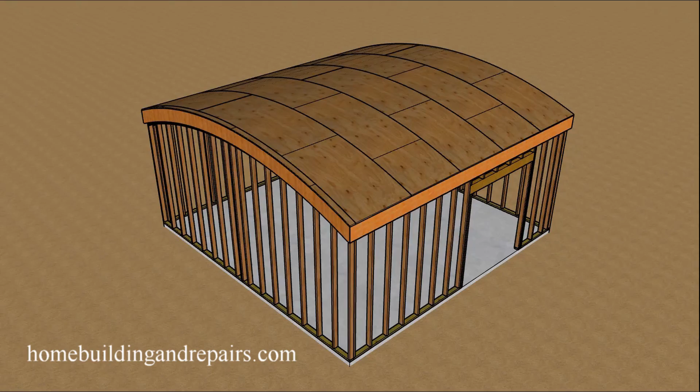Here's a video that I promised to make a while ago. I made a couple of videos on how to put together a wall with a curved top plate, and I'll put a link here to that video if you haven't seen it. But I thought this would be a neat video to make.

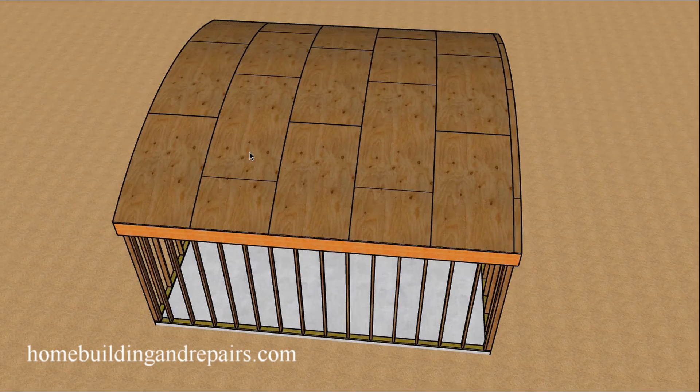I'll remind you this is not something that might work in your area. I hate these videos where people say 'oh, this will work.' Well, you've got to check with your local engineers and local building authorities, building and safety departments, stuff like that. So I'm not about to say 'oh yeah, perfect, just go ahead and build this thing.' It just might not work in your area or even in your country. People watch these videos all over the world.

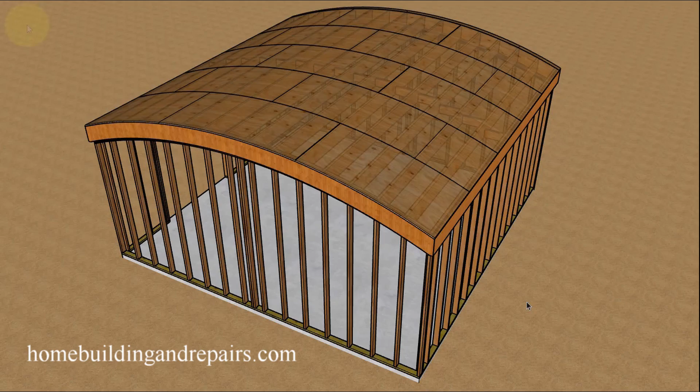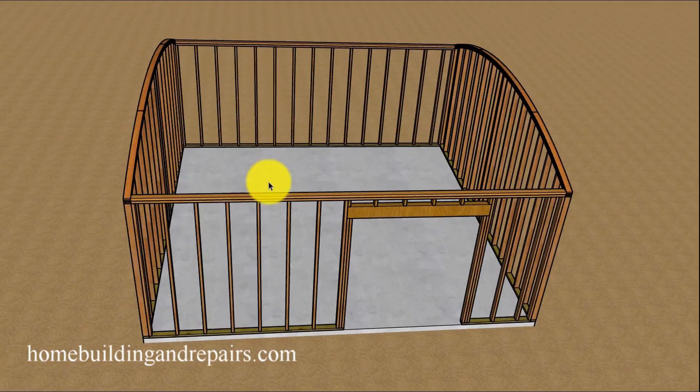Let's go ahead and pull the roof sheathing off, pull the fascia board off, and the 1x6 that we have for stucco or siding furring, and the midspan blocks. Pull out the blocks that are holding the rafters, or the joists, whatever we want to call it. Again, this is the building with the curved walls. I showed you how to build the curved wall. Now we have a duplicate on the other side.

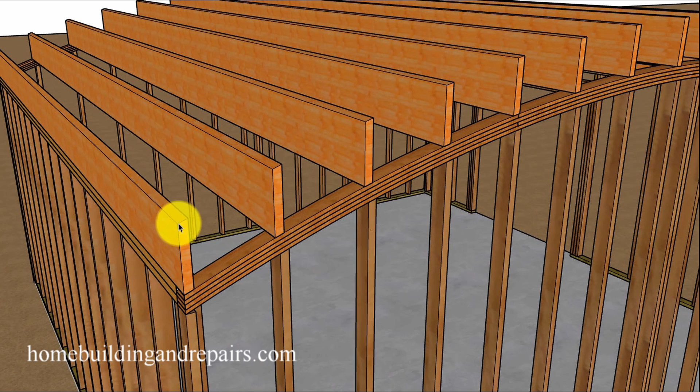Now, the first thing we need to do after we build the wall is install our joists, and they'll be installed one at a time. These actually have a shaped or angled top and bottom, and the lower joists or rafters are going to have a steeper angle than the ones near the top. As a matter of fact, the one on top is only going to need to be ripped down, it won't need an angle on it most of the time. Near the top, but the ones at the bottom, of course, you can see we will need an angle on the top and the bottom.

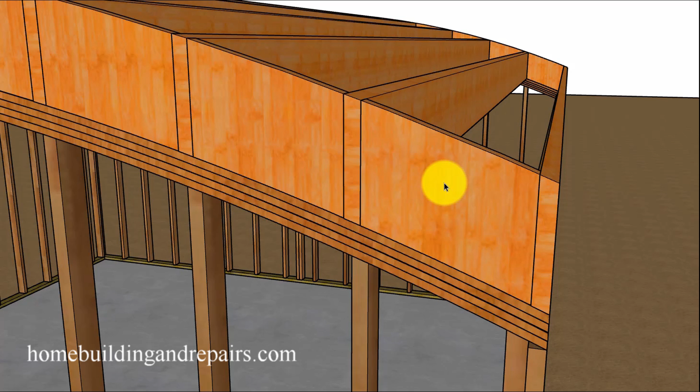And of course, shaped blocks - these will be cut, and they will not be the same blocks, just like these rafters will not have the same angle. The one down here might have a 15 or 20 degree angle. This one here might be a 10 degree angle. The one at the top might be 3 degrees. We can see here how it's getting a little shorter. I drew this up, so trust me, I know what I'm talking about here. When I say these parts are going to be different, it would be nice if they were the same.

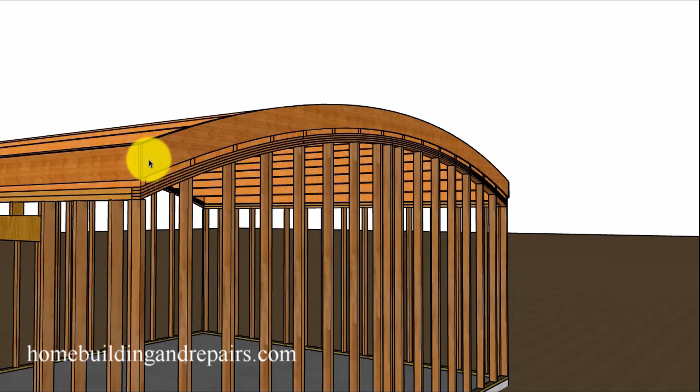This is kind of a common thing if you're going to have a building without an overhang. You usually have like a 3/4 inch spacer, and that's all this is right here, so that the siding or the stucco can go underneath the fascia board.

Let's go ahead and put the fascia board on. We can see here it's a little bit away from the wall. I went ahead and flattened this part out - that's common to do for something like this. Here's our gap that the 1x6 is providing us with, for the fascia board.

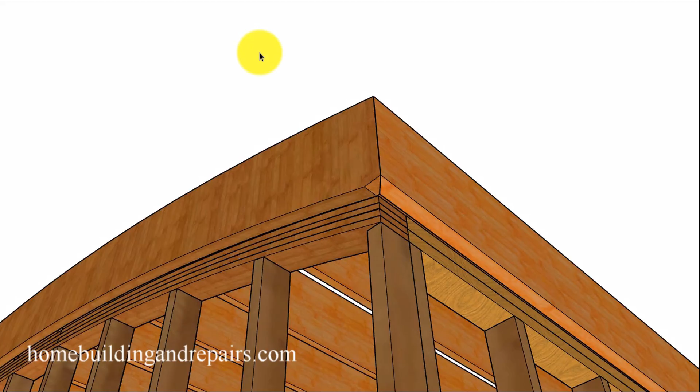Again, another view of the space between the fascia board and the bottom of the 1x6, and we can see that the fascia board is angled so that we can get some nice perimeter nailing. Here's our rafters or our joists.

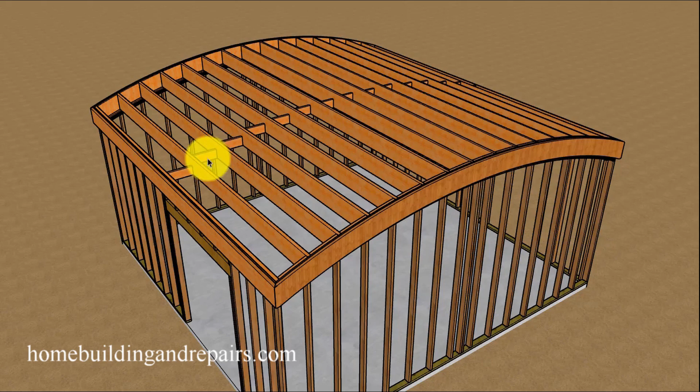Let's go ahead and throw some midspan blocks in. You can shape these midspan blocks, cut them - I just went ahead and put some 2x6 in here. Something like this would probably be required on a building with this type of a design. You can see here where I held the bottom of this block even with the bottom of the angle, and then just kept it level coming across here, nailing it into the other side.

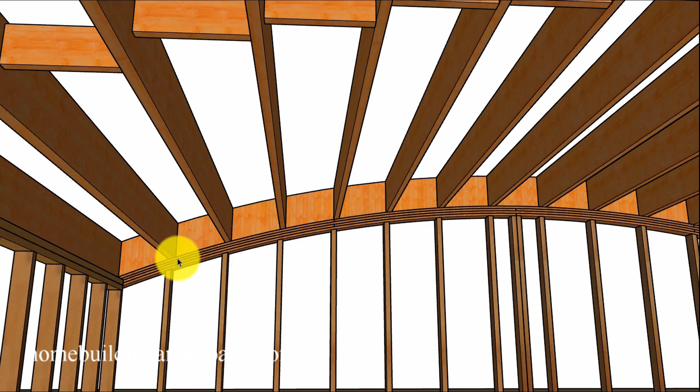Wanted to give you a view of what it would look like with the framing plates, and I would imagine something like this could be drywalled. Another view of it there.

Let's go ahead and put our plywood on, and that is it - we have sheeted the building. Now, 1/2-inch plywood would probably bend on this type of a radius, you might not have a problem with it. But you might need to space your rafters a little closer together. What I did here was I went 16 inches on center straight across and raised each one of these joists or rafters up.

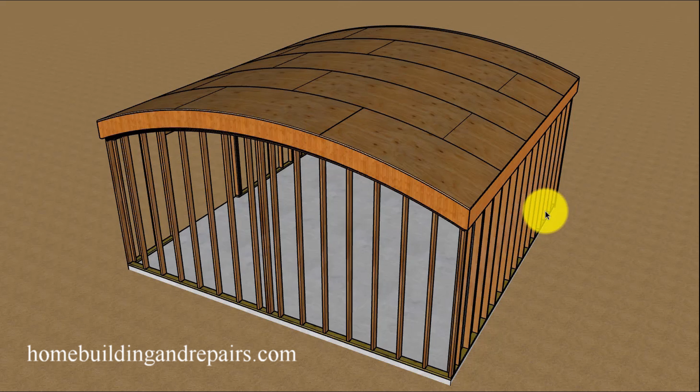You might actually need to make them a little shorter so that the plywood will work out. When you start curving plywood, instead of 16 inch on center plywood, you might need to have it about a 1/2 inch or 3/4 of an inch shorter. Again, I'll go into more detail on something like that if this is a video you're interested in seeing.